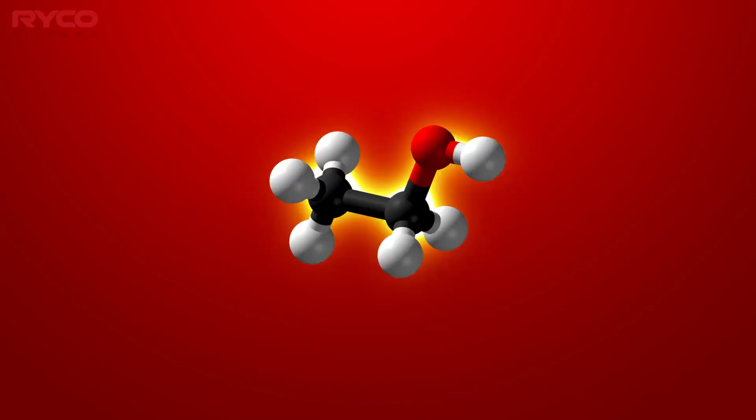Biofuels are liquids that are derived from plant-based materials, and as such, they fall into the renewable energy segment. The two most common biofuels are ethanol and biodiesel. Traditionally, ethanol was only used in solvents, paint, alcoholic drinks, and even perfume. But today, we recognise it as a cheaper alternative at the service station.

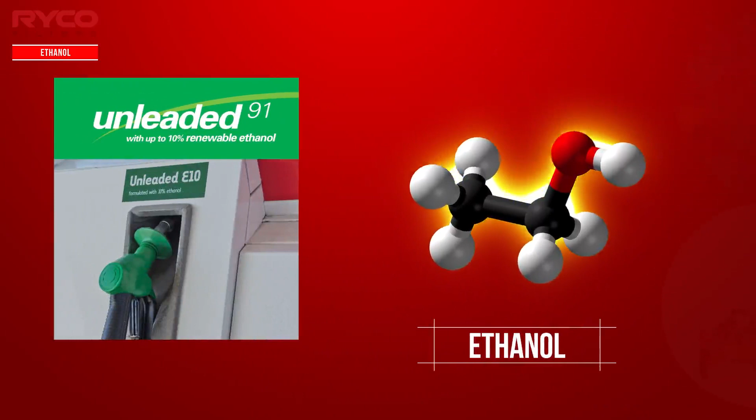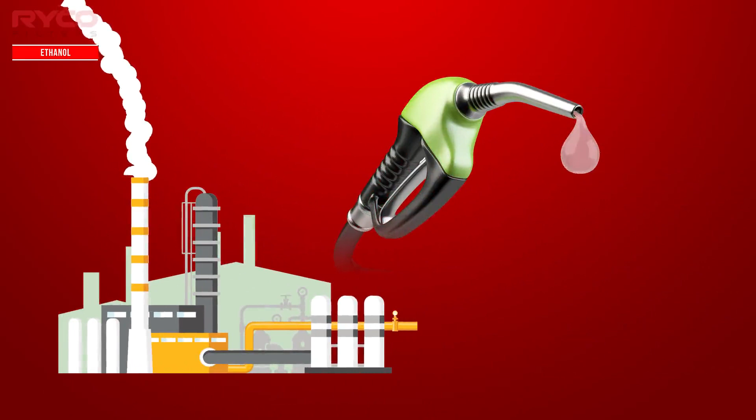Ethanol is derived from biomass, which in Australia comes from wheat starch, grain, or sugarcane. When processed, we end up with a colourless, flammable, oxygenated hydrocarbon. Ethanol in Australia is commercially available in two blends, E10 and E85. This simply means that each is a mix of regular unleaded and ethanol.

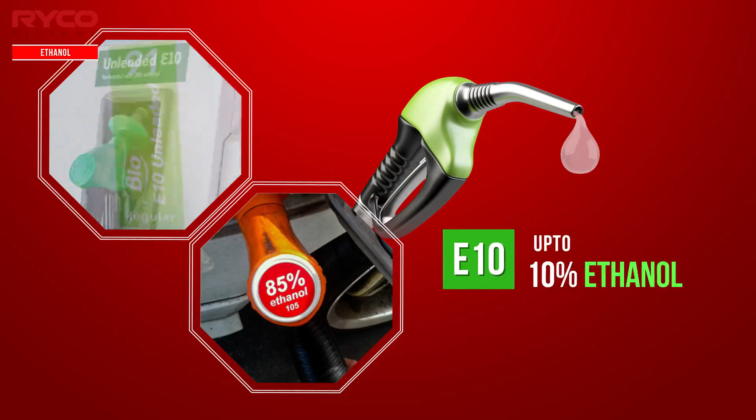E10 contains up to 10% ethanol and E85 contains over 70%, but no more than 85% ethanol. E10 blended fuel is compatible with most vehicle makes and models produced since 1986. E85 is generally used in high performance vehicles as it has a much higher octane rating than petrol.

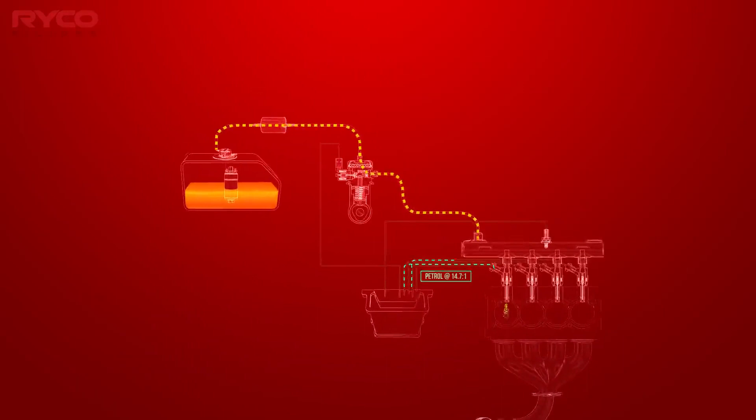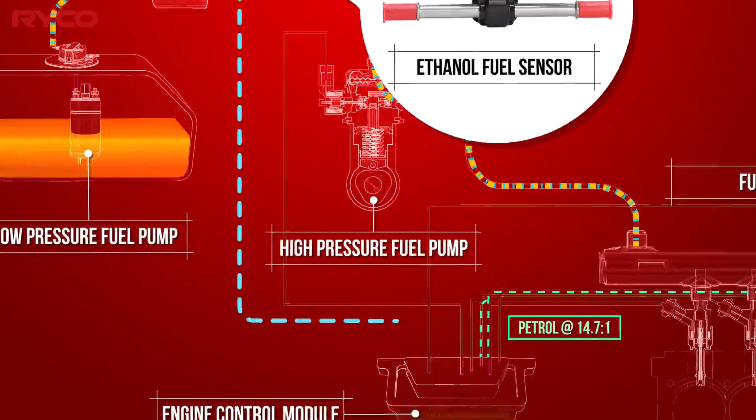We call road production models that are designed to run on all unleaded petrol types, or E85, flex fuel vehicles. These vehicles' fuel systems are nearly identical to a standard type, with the exception of an ethanol fuel sensor, which detects the ethanol content of the fuel and signals this information to the engine control module. The control module must alter the injection quantity and ignition timing to allow for E85's different air-fuel mixture requirements.

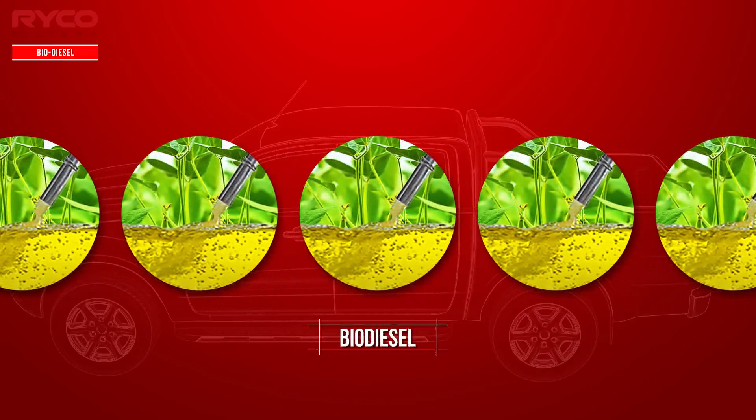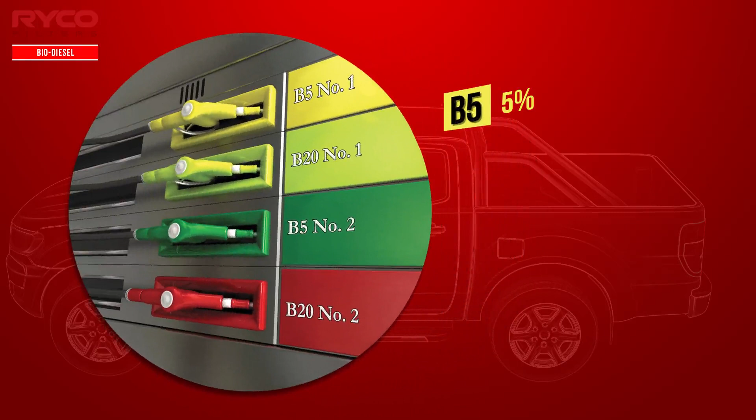Biodiesel is commonly produced from crops such as canola, sunflower, soy and rapeseed, or from animal fats like tallow, or even from recycled cooking oil. Biodiesel can be used as a fuel for vehicles in its pure form, but it's usually sold as a blend with regular diesel. The blends commercially available in Australia are B5, which is regular diesel with 5% biofuel, and B20, which contains a blend of 20% biodiesel.

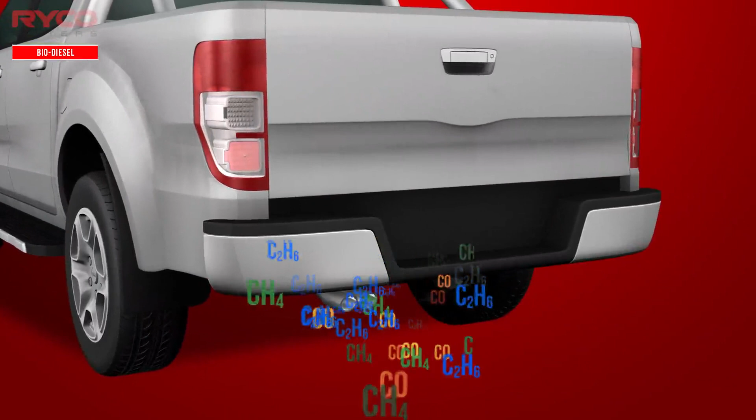There are no modifications needed for a current generation CRD vehicle to operate with this biofuel. In fact, CRD vehicles produce lower levels of exhaust particulates, carbon monoxide and hydrocarbons when burning this fuel type.

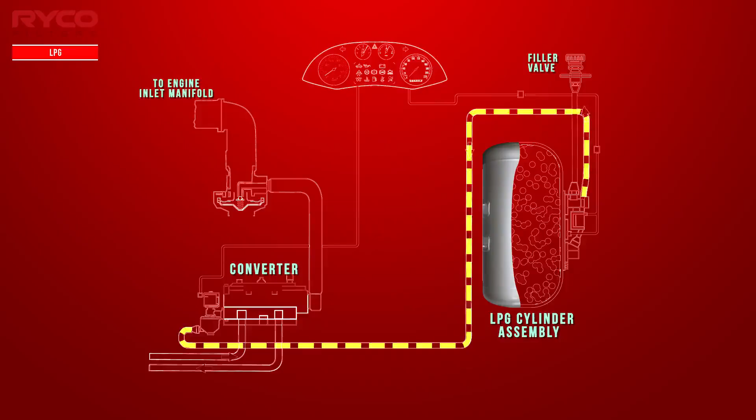Liquefied petroleum gas, or LPG, has similar burning characteristics to unleaded petrol, although with a much higher octane rating. It's the most common alternative fuel used in vehicles today. The gas is compressed and stored at around 200 psi in the vehicle's dedicated LPG tank. At this pressure, the fuel is in a liquid state.

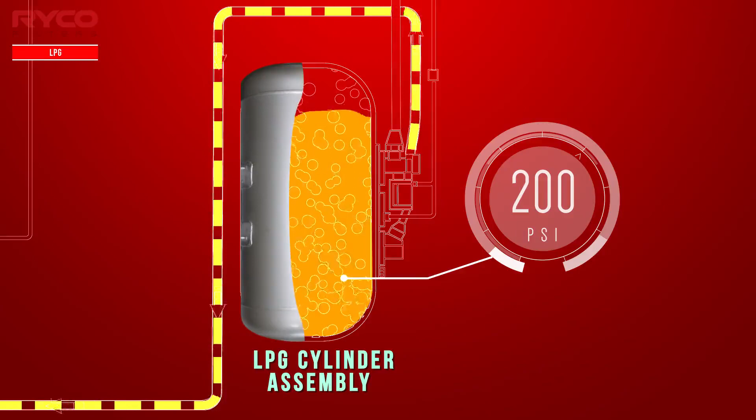Before the fuel can be ingested by the engine, its pressure must be dropped to slightly higher than atmospheric. This process is called conversion and is handled by the gas converter. The gaseous fuel is then metered and mixed with the intake air to achieve a combustible air-fuel ratio.

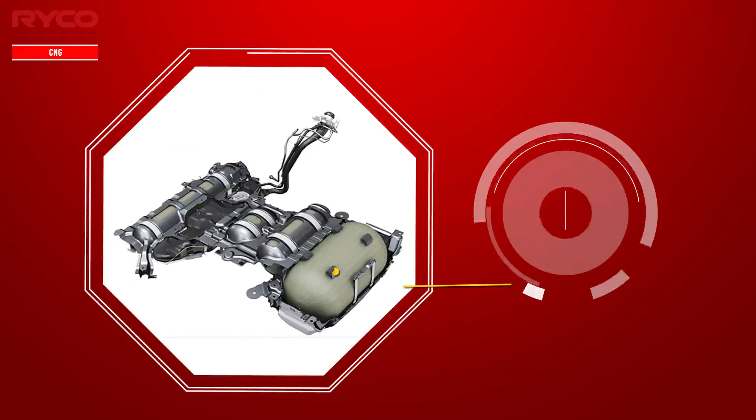Even though Australia currently has around 40 to 50 years of natural gas reserves, it's still the least used alternative vehicle fuel. One reason is because the fuel must be compressed to around 3,500 psi to be stored as a liquid. This is quite high when compared with LPG's 200 psi storage pressure.

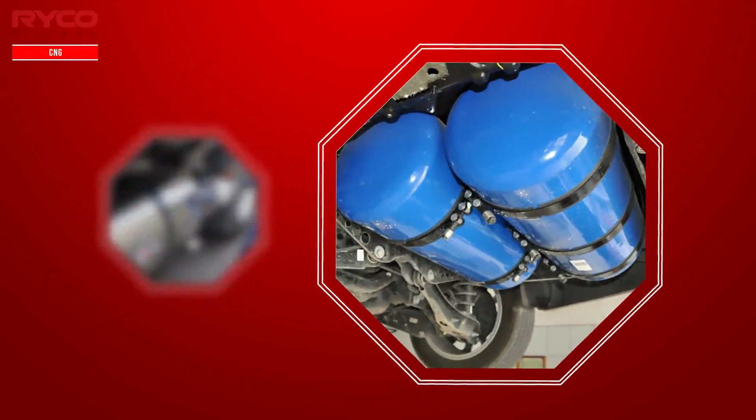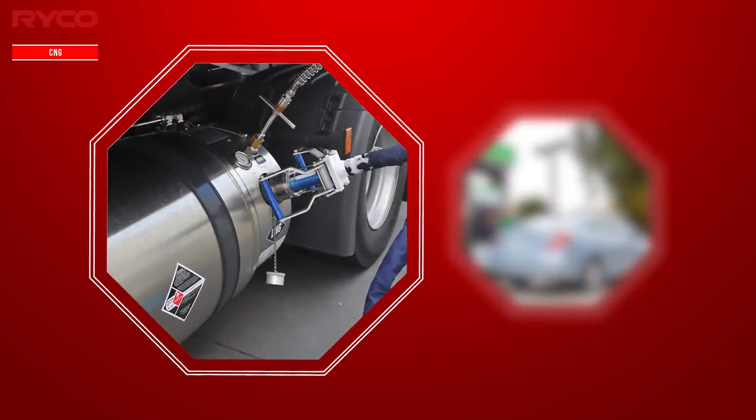Although the cleanest burning fossil fuel, the high pressure storage results in very bulky and impractical fuel tanks for a relatively small liquid volume. In this regard, CNG is a popular fuel for larger vehicles, in particular light trucks and buses. A current disadvantage of CNG is the infrastructure required to store and dispense large quantities of fuel for everyday use.

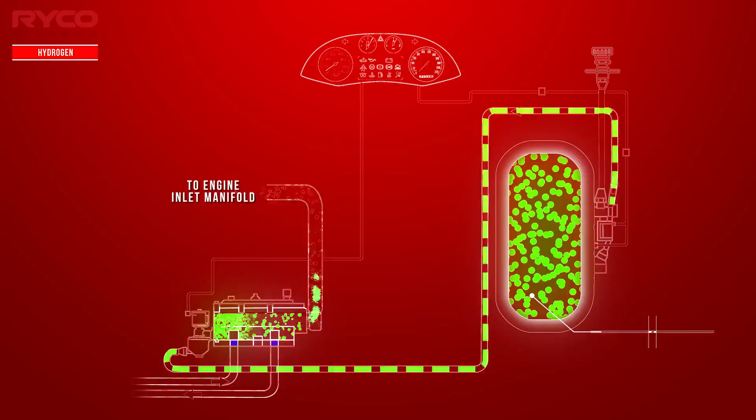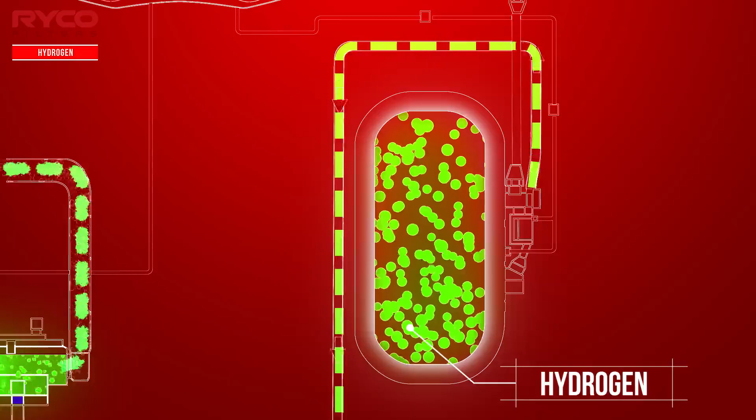Hydrogen-powered cars generally use this fuel in one of two possible ways: through internal combustion or through fuel cell conversion. In the combustion method, the hydrogen is burned in the same manner as LPG or CNG. The hydrogen liquid is stored under pressure in a tank and, as needed, is fed to a converter, where it changes state to a gas. It is then ingested in a similar way to LPG.

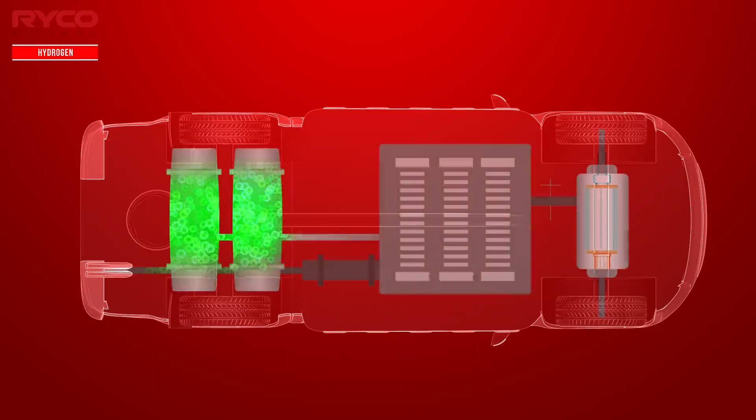Hydrogen fuel cell conversion occurs when the hydrogen is turned into electricity through fuel cells, which is then used to turn an electric motor. The only byproduct from the spent hydrogen is water.